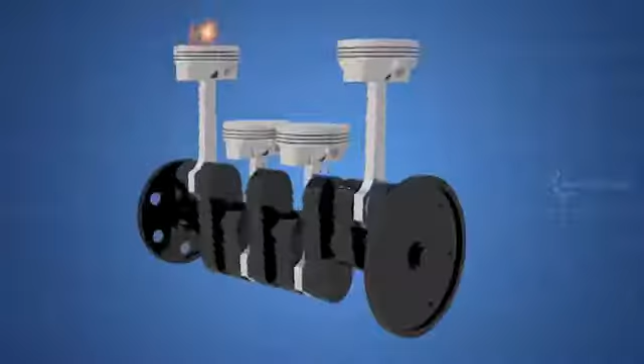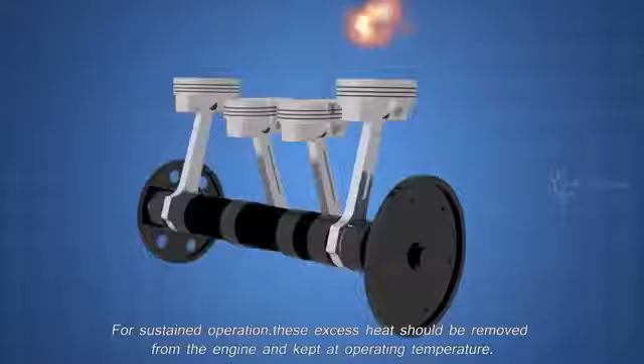A car engine is basically an internal combustion engine where power is generated through expansion of high temperature and high pressure gases. A lot of heat is generated due to the combustion gas and the friction of mechanical parts. For sustained operation, this excess heat should be removed from the engine and kept at operating temperature.

Now let's see the parts involved in cooling the engine. The main parts for cooling the engine are water pump, radiator, thermostat, coolant temperature sensor, and coolant.

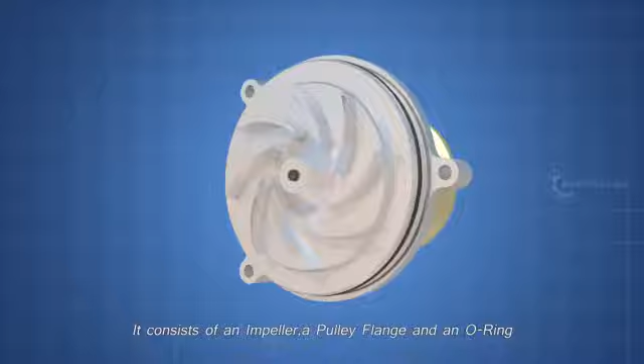First, the water pump. Water pump is the heart of the cooling system, which pumps the coolant. It consists of an impeller, a pulley flange, and an O-ring. The impeller is driven by the engine drive belt through a pulley.

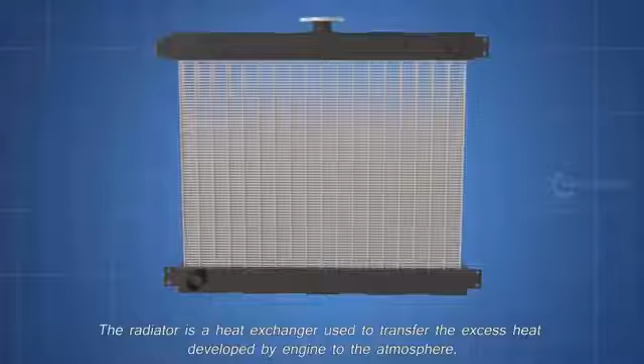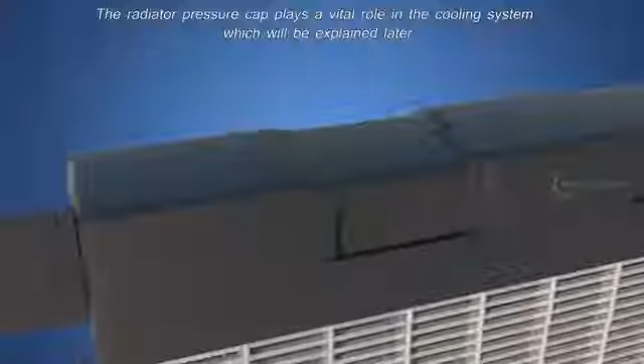Next, the radiator. The radiator is a heat exchanger used to transfer the excess heat developed by the engine to the atmosphere. The radiator has an inlet port, outlet port, a drain plug, and a radiator pressure cap. The radiator pressure cap plays a vital role in the cooling system, which will be explained later.

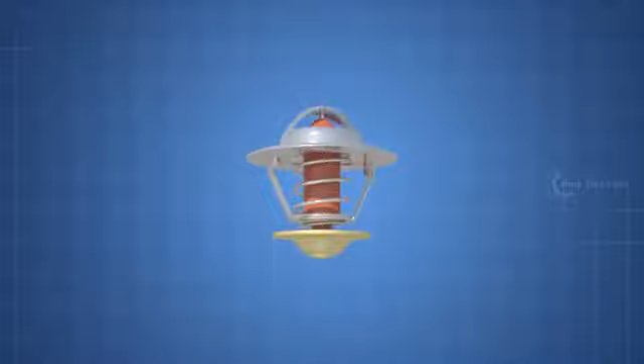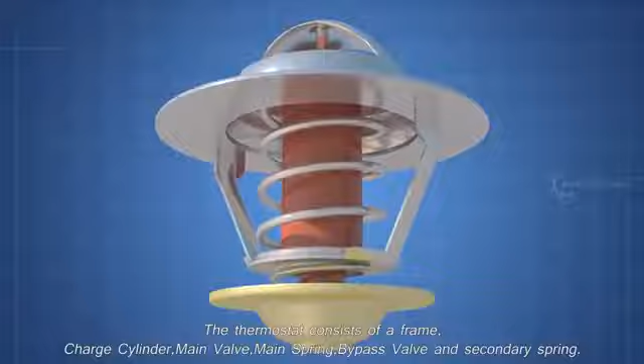Next, the thermostat. The thermostat is a valve which regulates the flow of the coolant and helps to maintain the proper operating temperature for the engine. The thermostat consists of a frame, charge cylinder, main valve, main spring, bypass valve, and secondary spring.

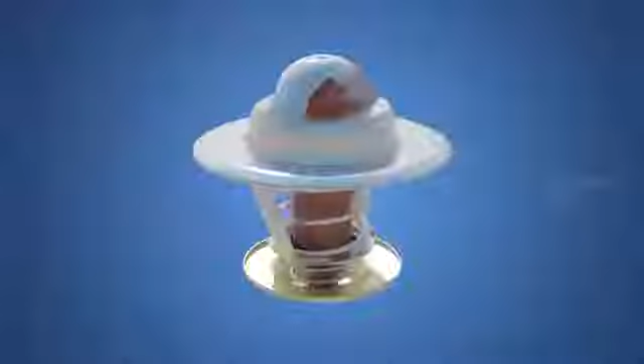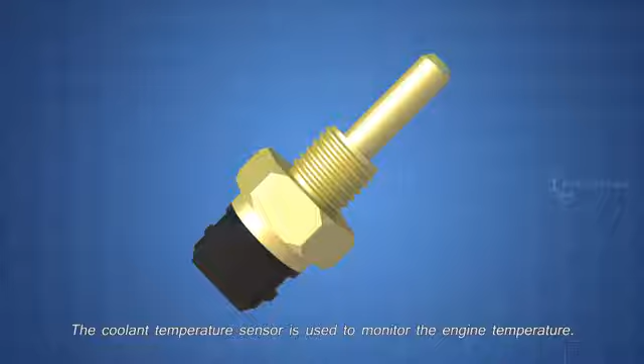Next, the coolant temperature sensor. The coolant temperature sensor is used to monitor the engine temperature. The ECU will use this data to manage fuel injection and ignition timing. Some engines have more than one coolant temperature sensor. The data is also used to control the radiator fan and to update the temperature gauge on the driver console.

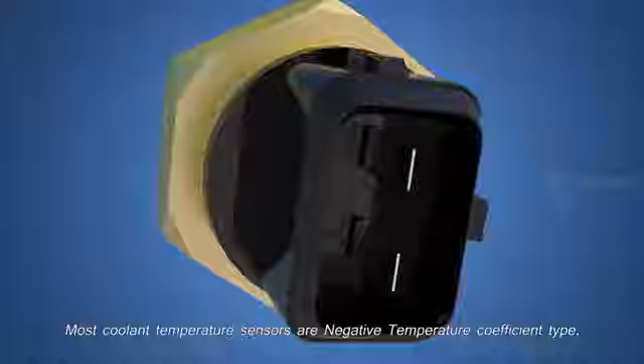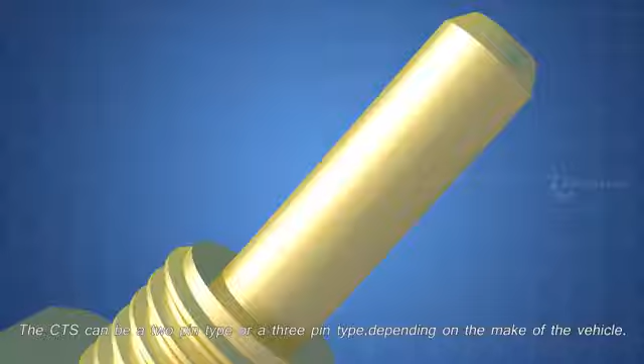The coolant temperature sensor consists of a sensing probe and an electrical connector. Most coolant temperature sensors are negative temperature coefficient type, which means as the temperature increases, the resistance will decrease. The CTS can be a 2-pin type or a 3-pin type, depending on the make of the vehicle. These are the main parts involved in an engine cooling system.

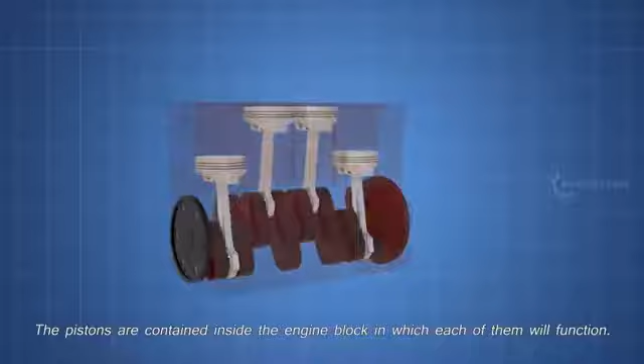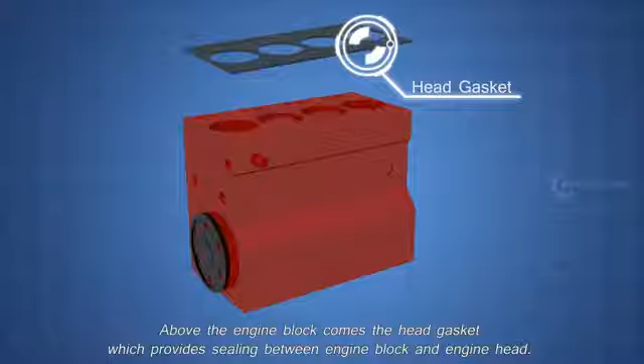Now, let's see how these parts work together. The pistons are contained inside the engine block, in which each of them will function. Above the engine block comes the head gasket, which provides sealing between engine block and engine head. It avoids compression leaks and oil or coolant leaks into the cylinders.

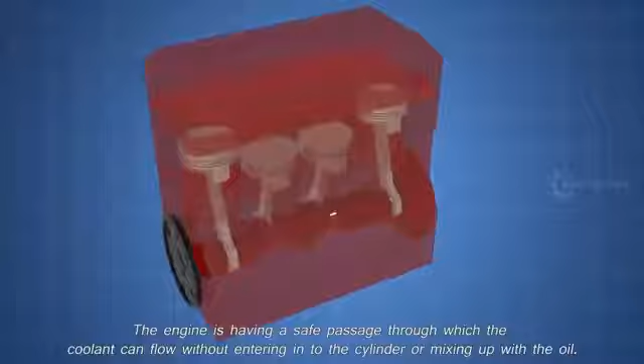Above that comes the engine head. The engine has a safe passage through which the coolant can flow without entering into the cylinder or mixing up with the oil. This passage is known as the water jacket. Let's put the parts one by one and see how it works.

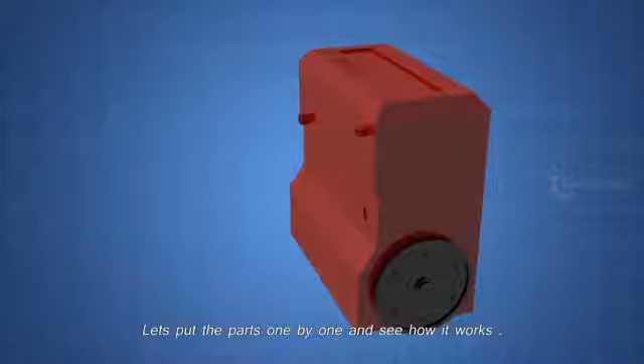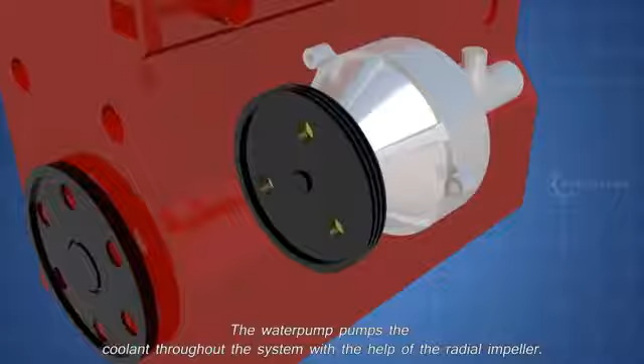The water pump pumps the coolant throughout the system with the help of the radial impeller. It is driven by the engine itself, using a serpentine belt. The serpentine belt also drives the power steering pump, alternator, and AC compressor. But for now only the water pump is shown. Now let's see the connections.

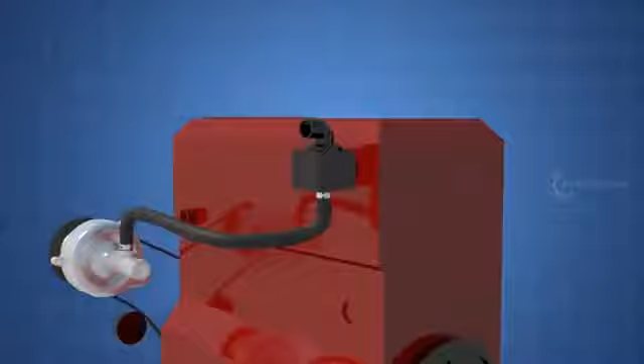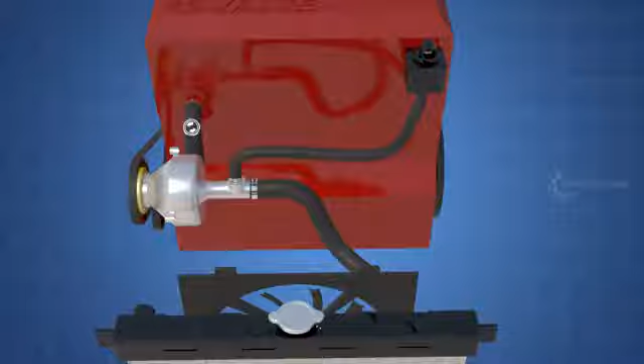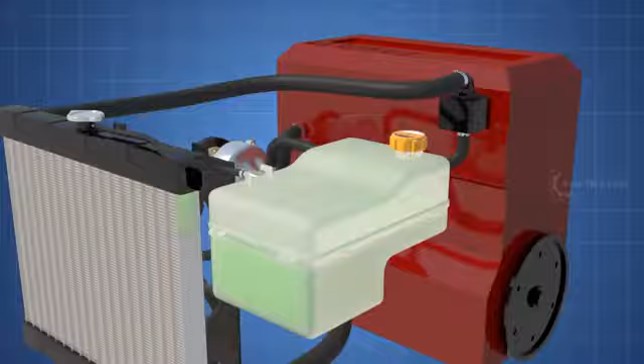The thermostat bypass hose. The thermostat housing. Inside the thermostat. The radiator, and the radiator fan. The lower radiator hose. The water pump outlet hose. The upper radiator hose. The coolant expansion tank. The expansion bleed hose. Coolant overflow hose. So, finally, let's get into the working, starting with the thermostat.

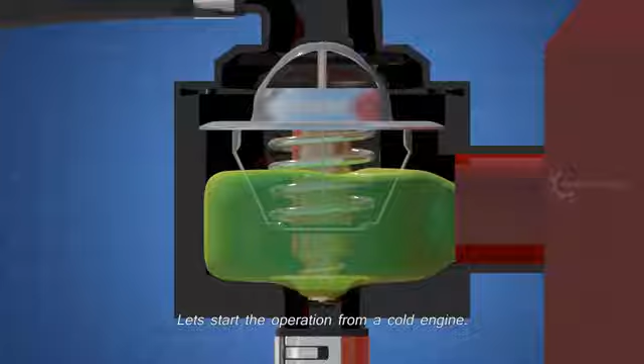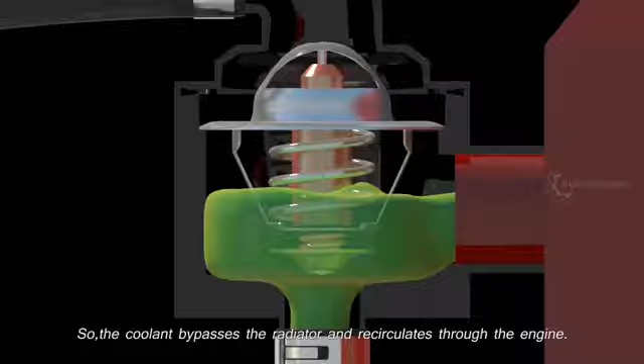The thermostat is actually a valve, which regulates the flow of the coolant. It will always be covered in the coolant, so that the temperature can be sensed. Let's start the operation from a cold engine. When the engine is cold, the bypass valve stays open. So, the coolant bypasses the radiator and recirculates through the engine. This helps the engine to heat up to operating temperature quickly.

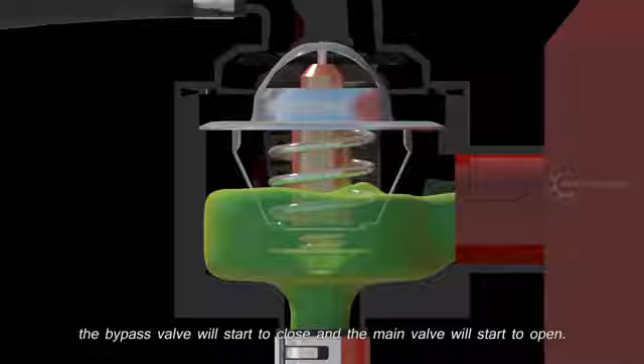Eventually, the coolant temperature increases by absorbing the heat from the engine. Once the coolant starts to reach higher temperature, which is usually between 160 to 190 Fahrenheit, the bypass valve will start to close, and the main valve will start to open. This allows the cold coolant from the radiator to flow to the engine side, and the hot coolant from the engine side to flow to the radiator.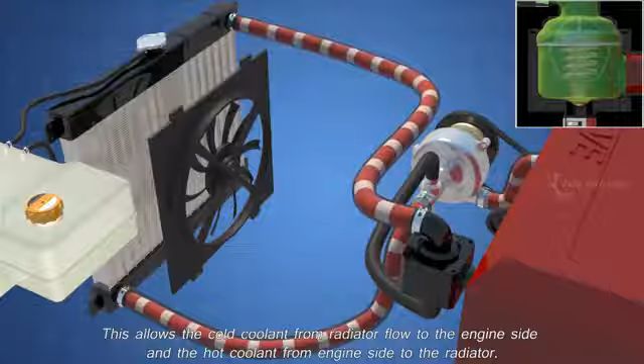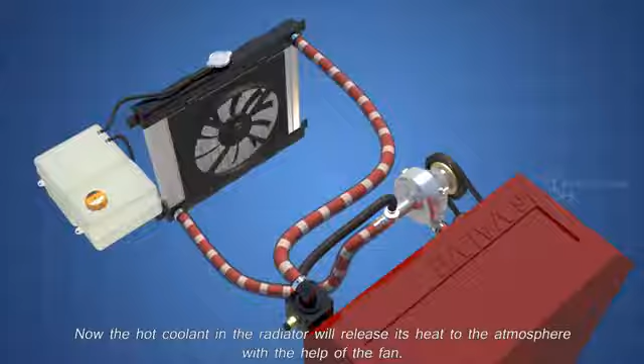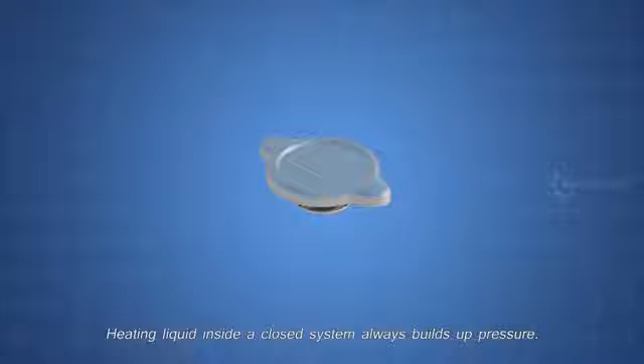In most cars, the coolant temperature sensor is located near the thermostat housing. It will turn on the radiator fan if the coolant to the radiator side is at high temperature. Now, the hot coolant in the radiator will release its heat to the atmosphere with the help of the fan. At the same time, the cold coolant received from the radiator will start to absorb the heat from the engine for the next cycle.

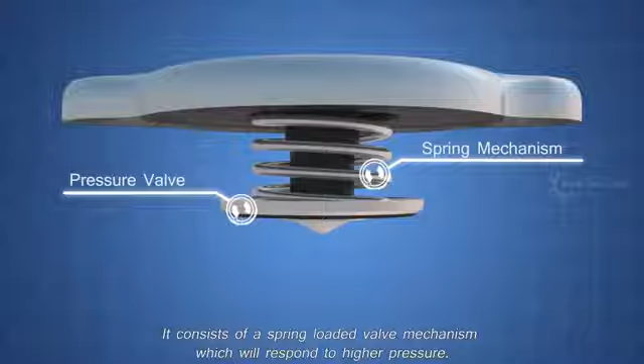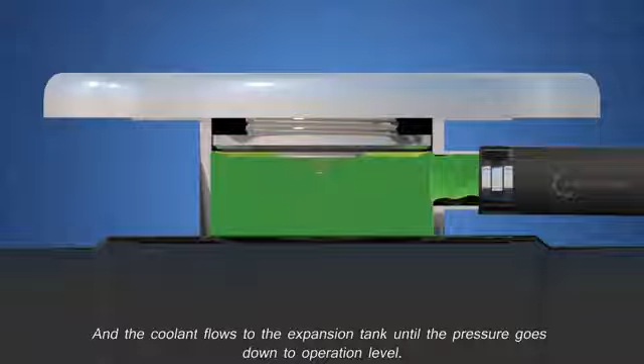Heating liquid inside a closed system always builds up pressure. So, how to maintain the pressure? Here comes the role of the radiator pressure cap. It consists of a spring-loaded valve mechanism, which will respond to higher pressure. Reaching a pressure above 15 psi will push the pressure cap valve, and the coolant flows to the expansion tank, until the pressure goes down to operating level.

And when the system cools down, the vacuum inside the system sucks back the coolant from the expansion tank. In case there is too much pressure build-up in the system, due to trapped air or other failures, the coolant in the expansion tank will be pushed out through the overflow hose.

The car heater system is a part of the engine cooling system. The heater system comprises the heater core, inlet and outlet hoses, and a heater control valve, which is optional and cannot be found in all vehicles. The heater core acts as a radiator, dissipating heat from the hot coolant to the vehicle interior, using a blower.